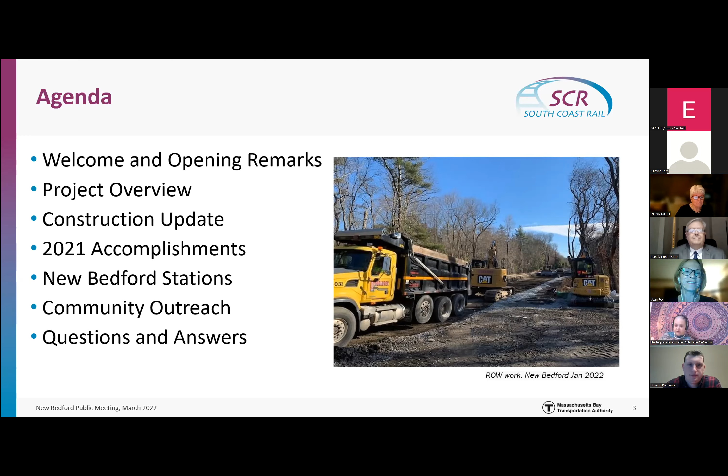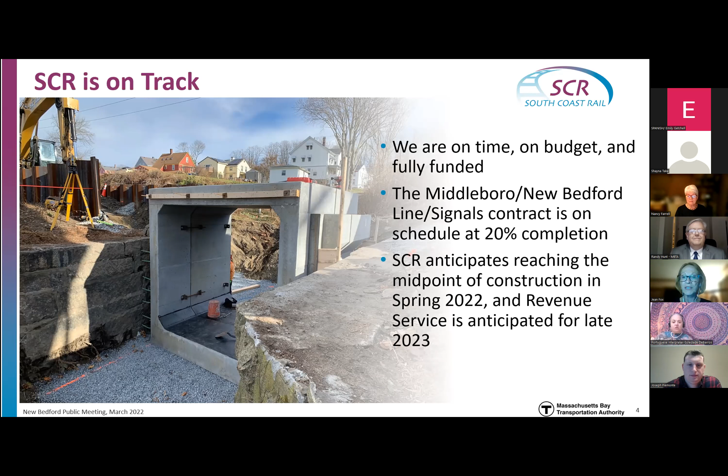So good to know that we're on time, we are on budget, and we are fully funded with state funding. The Middleborough, New Bedford, and Signals contract, the larger contract, the $405.3 million contract, is at roughly 20% completion. South Coast Rail anticipates reaching the midpoint of construction in the spring of this year, with revenue service anticipated for late 2023. Next slide, please.

So here are the maps Randy was referring to, and I think many of you have seen these before. We talked about briefly, Randy addressed the Stoughton line. What we're doing is extending the existing Middleborough service south to Taunton, Fall River, and New Bedford. If you look at that horizontal short train track line, that is the Middleborough secondary. We're building that, we're using that line to access what we call the Southern Triangle, which is common to both phase 1 and the full build.

We're going to have 6 new stations and 2 layover facilities. So for you folks in New Bedford, the layover is going to be at Wamsutta, which is right next to the New Bedford Station at the Whale's Tooth Sea Streak area. And then we'll also have on the northern part of the city, the Church Street Station.

In addition to that, we'll have Middleborough Station. And then on the Fall River line, you can see we have the Fall River Depot, the Weaver's Cove layover, and the Freetown Station, which is actually in Assonet. And then the East Taunton Station, which is right at 140 and 24, where that massive interchange project is currently underway. And then once you get in New Bedford, you'll go up over to Middleborough and then straight up and have the existing line that gets you into South Station in Boston. Next slide, please.

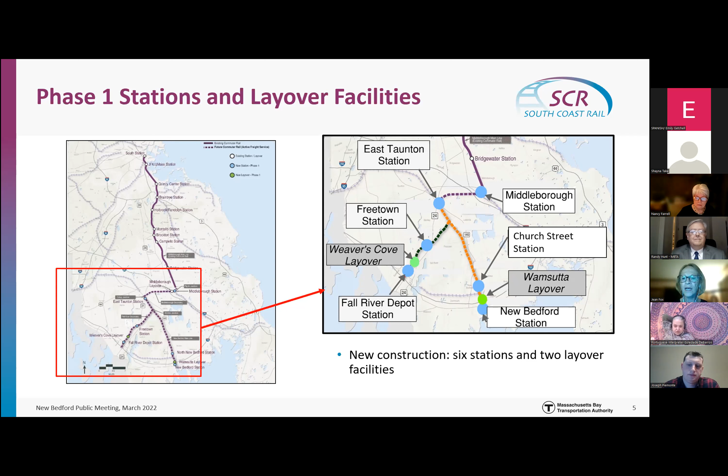So we did an awful lot in the past year. COVID didn't stop us at all. By the fourth quarter of 2021, the New Bedford and Fall River contracts had completed about $155 million worth of work. We completed a number of early action procurements for special track and other track materials.

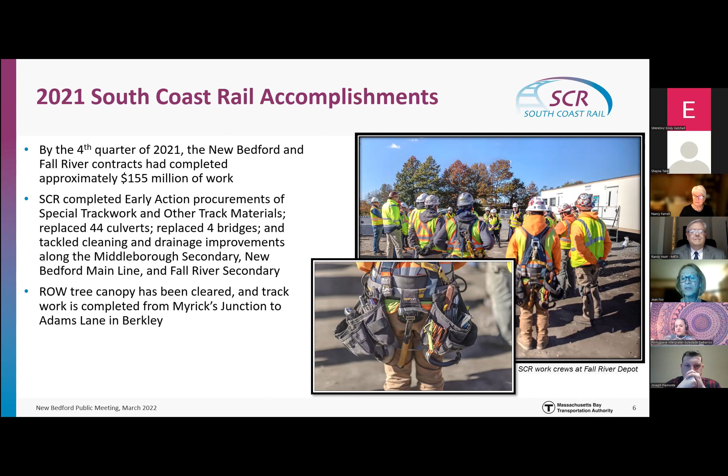We replaced 44 culverts, 4 bridges, and we tackled the cleaning and drainage improvements along the Middleborough secondary line, the New Bedford main line, and the Fall River secondary line. We did right-of-way tree canopy clearing per state and federal regulation, and track work is complete already from Myrick's Junction down to Adams Lane in Berkley. Next slide, please.

On the New Bedford main line in the Middleborough secondary, the tree canopy has been cleared and significant track has been laid from Pilgrim Junction to Cotley Junction. All of the grade crossings along the Middleborough secondary are well underway, and work continues along the right-of-way from north to south. So 4 of 11 culverts have been completed, 5 of 18 grade crossings, and 5 of 24.1 track miles have been laid.

To maximize the reuse of on-site materials and soils, South Coast Rail has a really extensive soil management program, which sends significant quantities of soils to Fall River, Weaver's Cove, at the layover, and to the Freetown Station. At this point, we have 25,000 cubic yards that have been delivered to Freetown Station and about 7,000 cubic yards that have gone on to Weaver's Cove in Fall River, all tested and all suitable soils for those facilities.

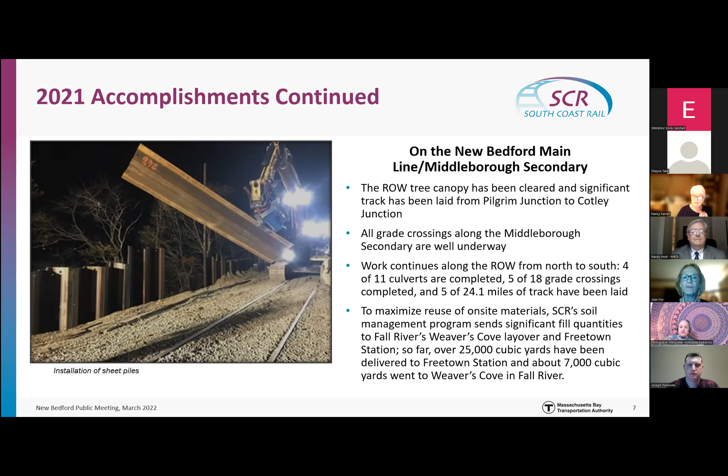The 10-week look ahead for Middleborough Secondary, Middleborough to Taunton, New Bedford Main Line, which includes Taunton, Lakeville, Berkley, Freetown, and New Bedford. At the stations in Middleborough, we're installing wing walls, station ramps, walls, and fine grading the station parking lot. At the East Taunton Station: drainage, utilities, fine grading the station parking lot, excavating for platform footings, and an elevator pit. I'll point out that the East Taunton Station is the only center island platform station on this phase 1, so it's a little bit more involved in construction, but it's moving along very, very nicely.

The Church Street Station, we're going to fine grade the station parking lot, and waterproofing for the platform footings is happening. At New Bedford Station, micropiles are going in for the station platform.

The track work, we are going to be doing an awful lot of track work this year. We're excavating to install ballast and ballast mats, which help with noise and vibration. We're installing turnouts at Cotley. Full depth track reconstruction will be going on at Middleborough Avenue in Taunton and south of Malbone in Lakeville. Then pile walls along the New Bedford main line will be going in.

Already you're probably seeing some work at the Wamsutta layover: drainage structures, electrical duct banks, and we're going to be excavating for the crew building, which will be on site. Remember, the layover facilities consist of 6 sets of tracks and a crew building. They're secure facilities, where the trains go to bed at night, and no maintenance occurs in these facilities — it's just cleaning and sleeping.

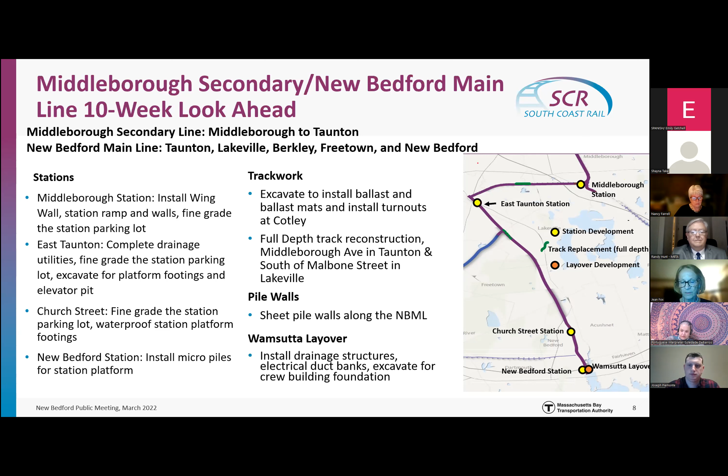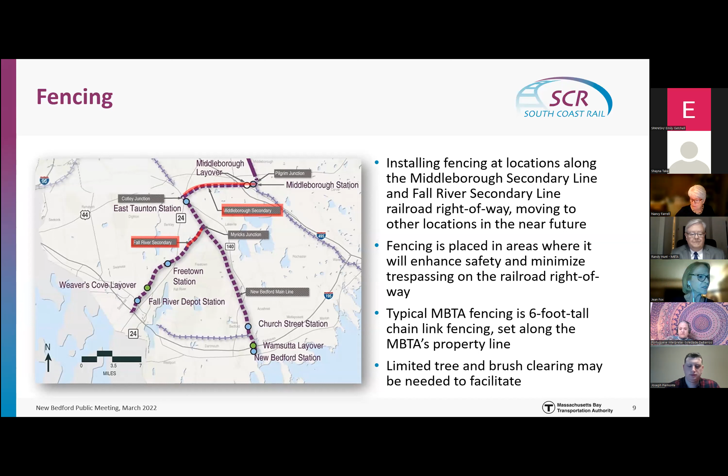We are installing fencing at a number of locations along the Middleborough secondary line and the Fall River secondary line, moving to other locations in the near future. Right now we're pretty much up in Middleborough, and we'll be extending down into the New Bedford area. Fencing is typically placed in areas where it enhances safety and minimizes trespassing on the railroad right-of-way, which is extremely important, particularly in an area where we haven't seen any kind of fast-moving train in decades. Trespassing is something we're paying very close attention to, and safety is, of course, a top priority. Typical MBTA fencing is 6 foot tall chain link fence, and it is always set along the MBTA's property line. Sometimes when we install the fencing, we have to do a little bit of tree and brush clearing to facilitate that.

So, station elements. This is not Union Station or Grand Central Station — it's not even South Station — but it's a very nice commuter rail station, which consists typically of an 800-foot platform, which you'll see at both New Bedford and Church Street. These are high level platforms; you can get on from any car. They all have a canopy.

At the Church Street station, we have accessible parking, EV parking, bike parking, 355 spots. There's going to be a bus stop and drop-off area, and also a nice landscaped area facing Church Street. The sidewalk on Church Street from Park to Irvington, just on the west side, is going to be redone. New signal systems are going in, and you'll see some intersection improvements at Church and Nash.

The New Bedford station has the same platform, 800-foot high level. There's a pedestrian bridge that will be placed from Purchase Street over to the station area. There's bike parking, accessible parking, and electric vehicle parking, with 352 spaces allocated there.

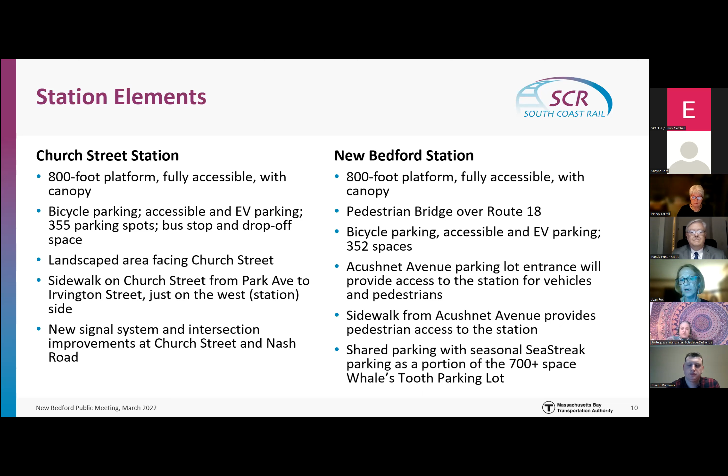An Acushnet Avenue parking lot entrance will provide access to the station area for vehicles and pedestrians, and the sidewalk from Acushnet Avenue provides pedestrian access to the station. We'll be sharing parking with the seasonal SeaStreak parking, a portion of the 700-plus spaces at the Whale's Tooth parking lot.

Here's a rendering on the left of the Church Street station, what it will look like when complete. The platform would be in the back, with the canopy over top, signage, and parking. You'll see the bus turnout for easy drop off and boarding for people taking the bus.

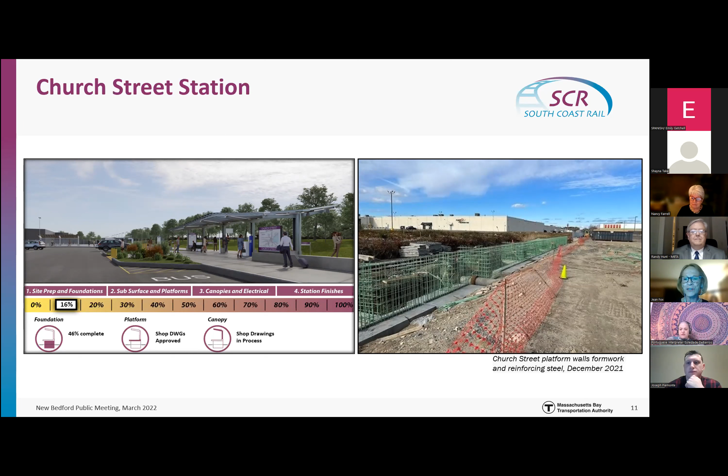It looks a little better now since that rendering is a couple of months old, but there's an awful lot of activity over at the Church Street station.

Also at Church Street, additional photos of the work in the area. It seems like we're going to see that platform come along soon, but there's a lot of preliminary work that goes on - drainage, utilities, a lot of activity - before you can really see it emerge as a station, but it's definitely come a long way.

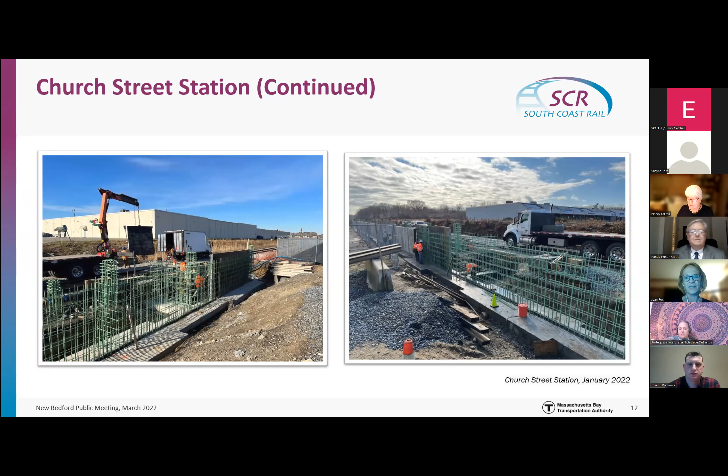Here are some pictures of erosion controls and right-of-way work. You can see the erosion control on the left, and on the right a high rail vehicle on the tracks - these are vehicles that can operate on the road or on the tracks. If you have clear areas to view the right-of-way, you'll frequently see equipment like this, and occasionally a crane. None of this should be alarming - this is a classic huge construction project with a lot of equipment that will be visible in many areas.

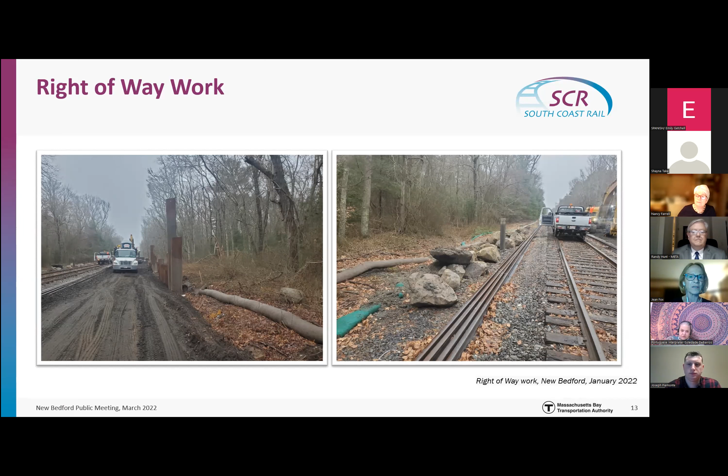The Wamsutta layover facility I mentioned has 6 tracks and crew quarters - there's a graphic of the crew quarter building below, along with employee parking that's gated and secure. This is a classic layover facility, not a maintenance facility, merely a place for the trains to stay at night and leave in the morning. These layover facilities are always located near the end of the line, and in the case of New Bedford, Wamsutta is right next to the southernmost station.

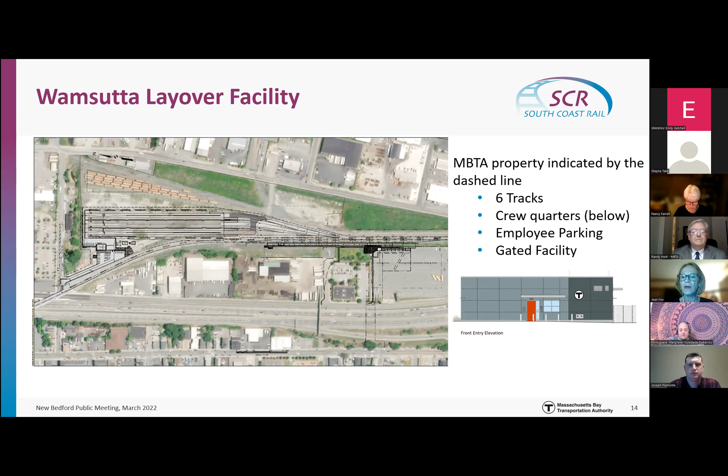Coordinating with the City of New Bedford has been ongoing and exceedingly helpful working with people in the city departments. We work with them on design and construction topics, and we've been working with them on the pedestrian bridge that will cross Route 18 in Acushnet. Our team also responds to public comments received via email and in briefings. The most frequently asked questions currently relate to fencing - people want to know how high it is, where it's going, and what it's for.

We're also aware of street parking issues near Church Street. I believe questions on residential parking would be something to bring up with your city council - it's been done in other areas, it's certainly doable. But we believe, according to all our ridership numbers, we have provided more than adequate parking spaces at the two New Bedford stations.

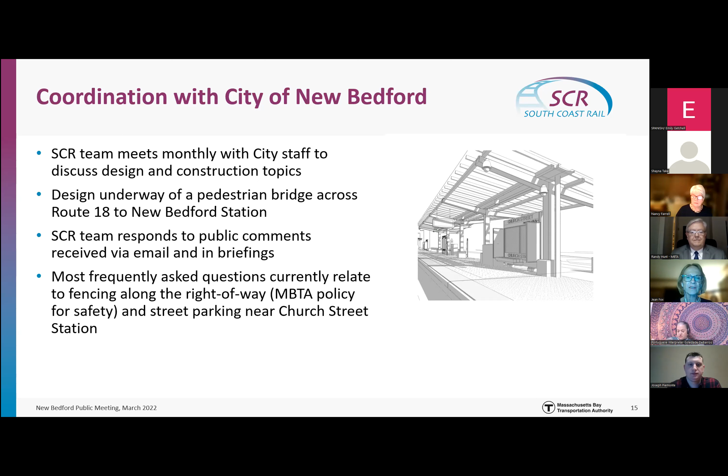What to know about construction - I'm going to pass along to my colleague, Bob Campbell, who is very well versed in all things construction. Thank you, Jean. So, what to know about construction?

In these meetings we usually give the hours of operation. The construction hours are Monday through Friday, 7 a.m. to 7 p.m. This time of year, with the interminably long nights before we get daylight back, the crews don't usually work beyond dark, so they're basically working 7 to 5 nowadays. As the days get longer, they'll extend their days to 7 p.m. I want to point out that's when construction starts - personnel who work on the job have to arrive at the site before the job starts, often in company vehicles with backup alarms, so you might hear them before 7 a.m. The exception to that is track outages - we don't have a 7 to 7 day for those.

We have, in order to minimize the inconvenience to residents, motorists, and freight traffic using the rails, times when we have the roads or tracks completely out. During those times we can't allow any traffic through, so we try to get those done as quickly as possible. We run work 24 hours a day, typically lasting about a 5-day duration, sometimes a bit less, sometimes more, but generally it's a 5-day, 24-hour-a-day period.

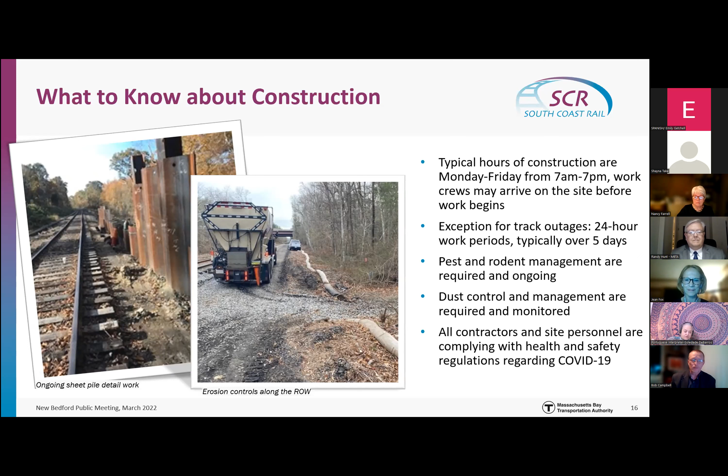Also, the contractors and site personnel are complying with the COVID-19 health and safety regulations. FRA is very strict, and we're under their regulations for any work we're doing on the tracks. Those requirements change situationally, but we are complying with all of them.